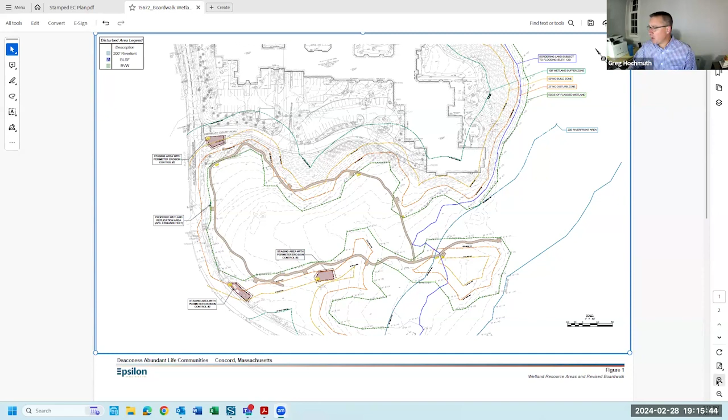Thank you, better? Greg, can you make it a little larger by any chance? I know it's still on the screen now, but I can't quite read it. Yeah, I'm gonna zoom in and maybe we can just kind of go through it. That's great. Wanna start here, Dave? Yeah, that's fine. I'm not seeing the color coding for the different resource areas on this one, like we showed this morning. We can talk through it anyway. It's not a big deal, let's do this one here. Oh, there you go, perfect.

That's the one, okay. So this would be the western portion of the proposed boardwalk loop. The areas shaded in green are areas that are in bordering vegetated wetlands. And Greg, if you want to scroll to the east a little bit. So this is heading towards the Sudbury River. And that solid blue line at the 120-foot contour elevation is the extent of bordering land subject to flooding. So that last section of the proposed boardwalk, which is colored grayish blue, is in riverfront area and bordering land subject to flooding. The hatched portion of that blue is BLSF, and there's a little sliver of riverfront area that extends to the west of that.

The boardwalk was - Greg and Bill spent significant time out at the site trying to realign this thing and pull it out of the bordering vegetated wetland (BVW) to the most practical extent, consistent with the goals of the project. We've reduced it by, I think, at least 50% in BVW.

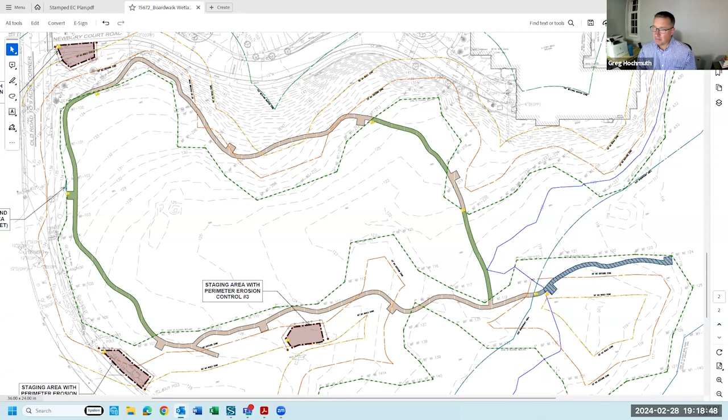The other areas where it's showing in BVW are just two crossings in order to complete the loop. We tried to pick spots that were void of vegetation to minimize any impact to shrubs. No trees are proposed to be removed at all as a result of this new layout. We did have to cross the wetlands, so crossing at the narrowest points seemed to make the most sense, so we could show the commission we've done our best to minimize impact to resource areas.

Delia, was Bert out there visiting the site? Do you feel pretty good about minimizing the boardwalk in the BVW? Yeah, obviously there's topography and other considerations out there.

As Greg said, we're avoiding trees. We're not avoiding trees just in the BVW - we're actually avoiding cutting trees down for the entire boardwalk, including in uplands. So you're right, topography is definitely a factor.

Sorry, if you don't mind, I'm just going to move this. Okay, sorry, go ahead.

Sorry about this - since this is intended to be an ADA compliant boardwalk, we have to be mindful of topography and grades. We can't have people in wheelchairs trying to climb and go down things like this, so those were factors in this new alignment as well.

As far as the narrative, we did expand it. Bill provided a bunch of construction information as well as photographs of similar projects he's done in towns in Massachusetts, and that was part of the package we provided. It went into quite a bit of detail in terms of the phasing of construction and all the individual steps required from beginning to end to construct one of these things.

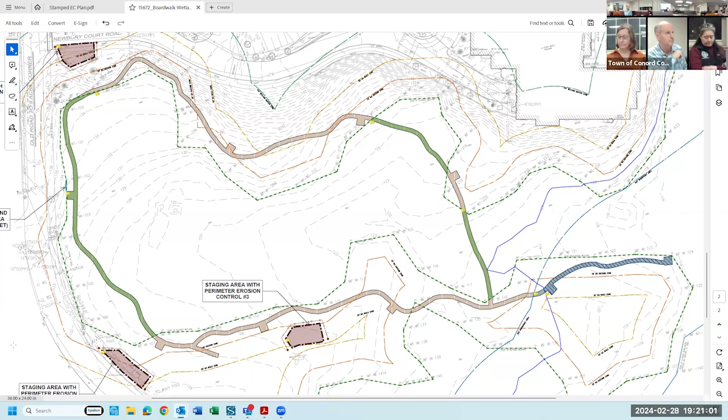The site plans, as Greg mentioned, were prepared by Nitsch Engineering, and they signed and stamped these plans. They are a professional land surveyor, so we've got much more detail than what was originally proposed on those GIS-based figures.

There are three polygons that are kind of almost flesh colored that are intended to be the staging areas, and those are all in uplands. Those are surrounded by sedimentation and erosion controls, which we discussed at the last meeting - the commission wanted to see those.

We are showing a proposed replication area on the western side of the project of 6 square feet. That is intended to offset the collective footprint of the posts that are going to be in bordering vegetated wetland. If you add all those posts up in BVW, it's about 2.9 square feet, just under 3 square feet. We're prepared to put a replication area in to offset that at at least a 2-to-1 ratio.

But we're also removing the bog bridges that are in the BVW, and those total about 150 square feet. So if the commission is willing to accept the removal of the bog bridges in lieu of us going out there with shovels and digging a 6 square foot hole, we'd be happy with that. I think we can figure that out.

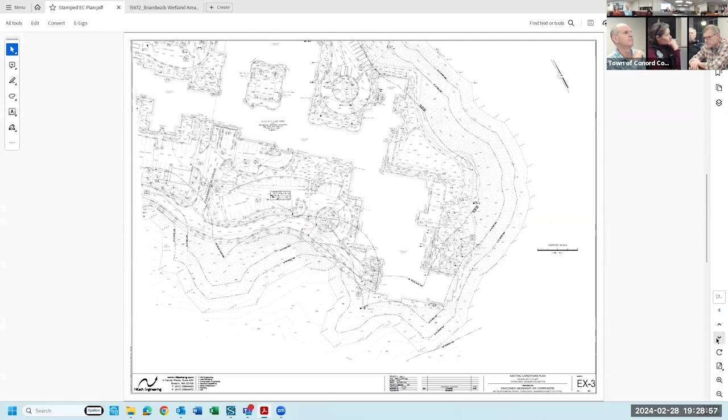It doesn't look like it's on here, but we can get that on there. Good, okay, thank you.

And then I think one of the notes we're looking at is really a question regarding width of the boardwalk. As you're prescribing it, I think it's 4 feet now, if that's correct, in the BVW. And then there's the question about how high that boardwalk is, by way of looking for basically 1 foot of height for every 1 foot of width. I'm not sure exactly what your heights are in the boardwalk, if you will. So that's a good question.

In fact, we had a conference call via Zoom this morning with Delia and Bert and the Wetlands Program Circuit Rider for the Northeast Regional Office, Alicia Galen, to try to get some idea of what DEP's guidance or expectations are with respect to that.

They don't have a formal policy. I think in the past they have ideally said that you would try to match the height above the ground of the boardwalk with the width of the boardwalk, but it's not a hard and fast rule. What they really want is to just ensure that the function of the wetland is still being provided based on the final configuration of the boardwalk.

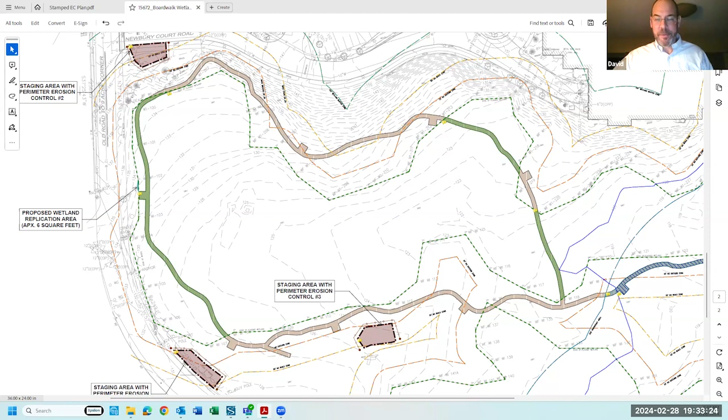I think the concern, David, is that we're really focusing on the potential impact from shading. We're hoping you can provide some comfort that if the boardwalk is raised 2 to 3 feet, there will be some... I understand you can't say what the plant community is going to be, but I think the commission is looking for confirmation or some level of comfort that you're not going to have a bare soil condition, since that would then be an impact that you should be mitigating for.

Also, yeah, I agree with you. And I'm wondering, Bill, you're working with Mass Audubon - I think they ought to have guidelines about that. They have boardwalks, for example, down in Broadmoor in South Natick. They're fairly high, though it's been a long time since I've been there. But I would think they'd have guidelines to help us figure this out. And if DEP doesn't, what about the boardwalk in Carlisle?

It is raised, and there is vegetation growing underneath it. Yeah, you're right. Is it the cranberry bog area? I don't think it's the cranberry bog. There's an overlook. It's not Foss Farm. I can't think of it.

Well, what about Minuteman? How about on Great Meadows, right down on the Dyke Trail? There's a boardwalk that goes out - I was out there for observation today. Oh yeah, good, yeah. And that's pretty high, nice.

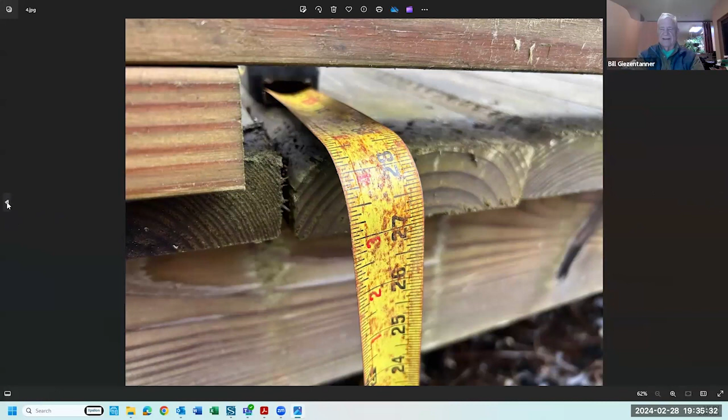I'm going to pull up some photos. Let me see if I can pull these up. Well, while Greg's doing that, let me say every boardwalk we've built has been kind of an experiment. For the most part, we have vegetation under even boardwalks that are 6 inches above. This is a terrible season to be out there trying to show that, because almost everything is dormant. But if you've been to Mass Audubon sanctuaries and looked under boardwalks, you will see vegetation. It's not the same vegetation that's getting full sun, but there is vegetation underneath.

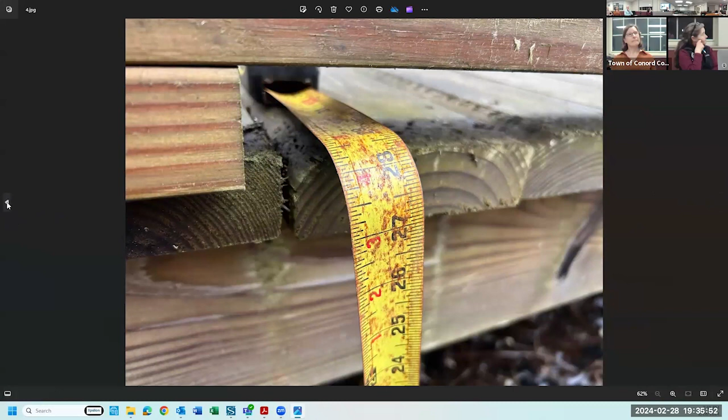And Delia, you do note, at least in our notes, the issue in Lincoln, for example. Isn't that DEP telling Lincoln they should raise their boardwalk? So they said they should provide replication, and then DEP very recently withdrew that appeal. Okay, said we can figure it out. I see, okay. So in the call we had with DEP this morning, the guidance we understood was basically that the commission just needs to have enough information that they feel comfortable.

That the impact from shading will not occur. And so if we move forward and say the 2 to 3 feet is fine - just out of curiosity, what happens in 5 years if there is a significant impact? I mean, it's all dirt underneath and there's vegetation on either side. Is it just what it is at that point? I think that's correct. At that point, it is what it is.

I think the commission - I think having these photographs would be helpful. Any additional information the applicant can provide, and then the commission should include a finding in the order of conditions that says, based on the information that has been provided, the commission has determined that this 2 to 3 foot height is adequate to eliminate the impact from shading.

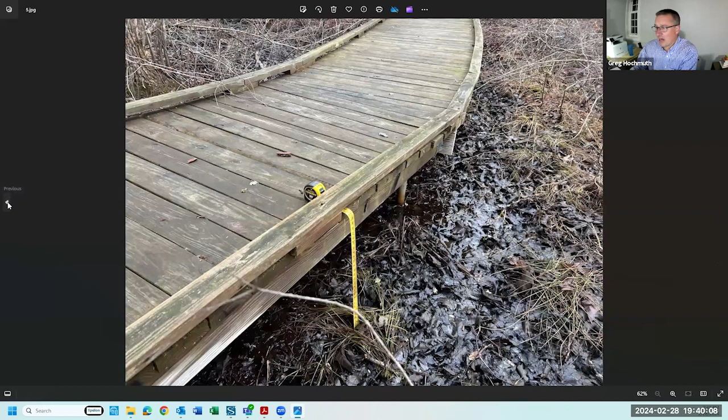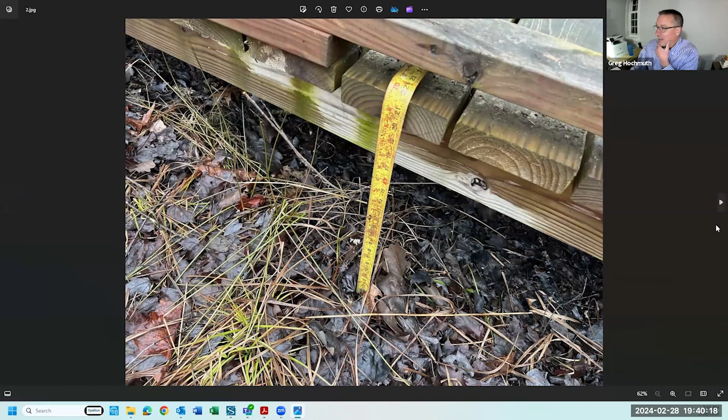I found another spot, would be helpful. This spot here was 22 inches to the top of the deck, so not quite 2 feet, a little lower. I was struggling to find vegetation anywhere, just so I could show some meaningful photos to the commission. This vegetation didn't quite extend to the middle of the 5-foot section, but it was in at least 2 feet.

I think it's not really the top of decking that matters, it's the bottom, so you're looking more at 18 inches in this photograph. So 1.5 feet is not going to be adequate. No, and we're going to be even better than that. We're going to be 2 to 3 feet.

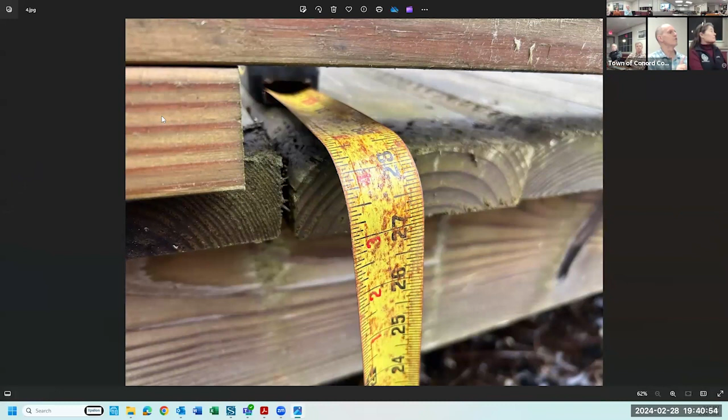So if we can provide the commission some examples, a handful of examples of where, between the bottom of the decking and the ground level, there's 2 to 3 feet where you have vegetation. I understand it's a difficult time of year, I think you're not seeing a lot of vegetation more because it's a winter condition. Maybe, Bill, maybe there are some existing photos that Mass Audubon has of Broadmoor or Minuteman.

I do think that's a great example, Minuteman. Yeah, it's worth going out to take a look at that as well. So the suggestion is that they can provide some good photo documentation with growth. With the tape measure, that's very helpful. Yeah, tape measure is great.

Are we saying that we're thinking that at a minimum, there's 2 feet of clearance from the structure? In other words, whatever the structure width is, from the bottom of the structure to grade, there's at least 2 feet.

I thought it was more, I thought it was 3. I would say it's at least 2, given what we saw in that first photograph with vegetation going into the center line with 2 feet clearance from the bottom of the structure. Yeah, it's probably even a little less, given the tape at 28 inches.

That structure is probably 6, 7, 8 inches thick, so if we can get a 2-foot minimum clear from structure and a 4-foot width, that's in the BVW. That gives you, at a 45-degree angle, 2 feet up will give you probably 2 feet of coverage on the other side, but it's mostly coming from the south, and the light.

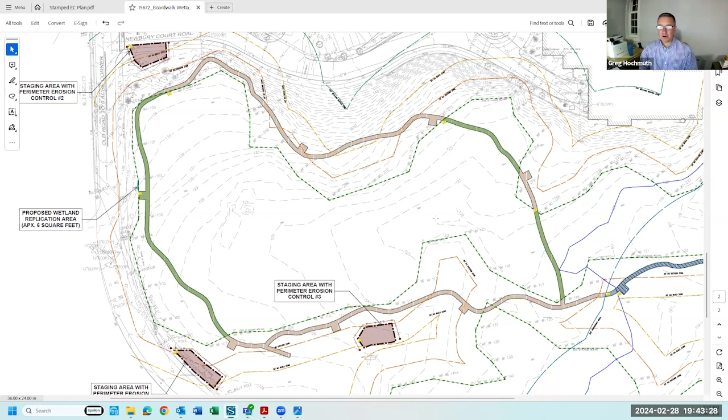And that'll be how high eventually off the... no less than 6, right, Bill? Right, we want to keep it at least 6 inches, because if you get lower than that, you're inviting rot to the wood.

Okay, gotcha, thank you for the clarification. This is silly, but why not higher? Even on the upland? Yeah, I think that's a good question, and there's no reason for it not to be higher. Thank you. I think you ought to look at that.

Good suggestion. All right. The only reservation I have is, mostly I've done boardwalks that aren't handicapped accessible, and if you're over 36 inches above the surface, then you need a handrail. Okay, these are gonna have handrails anyway, so there's no point in not being higher. Perfect, great, that's a good suggestion.

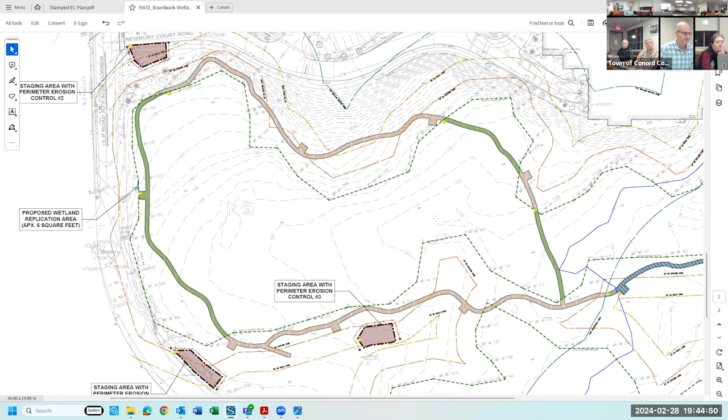Any other comments from the commission on this at the moment? No. All right, is there any public comment regarding this application? All right, seeing none, Delia? Yeah, I don't see any.

So do you think, based on... well, I guess we'll need a resubmission, right? Because we need the little ramp at the top we talked about, the location, a little bit of that stockpile, a little bit more detailing, photo documentation.

Based on the discussion this evening, would you guys be comfortable coming back for the March 20th meeting? Which means you'd have to file a week from Friday? I think that will work. Dave, Bill? I'm sorry, the submittal deadline again, would it be a week from this coming Friday? Week from this coming Friday, yes. I don't see a problem with that.

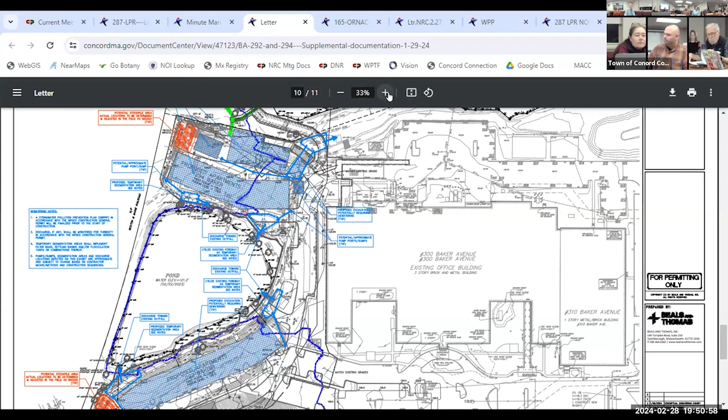Because the other part of this sketch is everything in blue - those are gonna be the areas where we're potentially gonna have to de-water. We show a few outlines where those would be sedimentation areas, either sediment basins or sediment bags, where pumping would occur. Let me just point out, so this structure, this one and this one are the ones proposed that are thought will need dewatering, right? Yes, wherever there's a relatively significant excavation, we assume.

So this light blue hatch, there's 5 areas - this one, there's one here, one second, there's 5 total, there's 3 right around the ponds. Are those the sedimentation areas, like forebays for that? Yes, that's the idea, is where the dewatering - we show a little circle where the pump location would be and the line to dictate the discharge piping, but it's all schematic at this point.

So for example, this is a sump pump here, yes, goes into this basin. So have they been sized for anything? No, not at this time. So how do you know what volume you're anticipating you're gonna need to dewater?

As part of the SWPPP, we'll have to size the sedimentation basins. But you need to do that as part of the Wetlands Protection Act regs too, right? So the construction, pollution prevention, sedimentation, erosion control plan - that's something the wetlands regs also require, right? Yes, so at this time, right now, this is all largely schematic.

It was just a matter of showing general locations of where these things would be. We haven't put any real design as far as depths, for example, but the idea was just to show logically where you could maybe grade in a basin, the flatter areas. Then I show the arrows - those would be the discharge points, really pointing those at existing outfall locations, just to try and minimize. Right, so there's an existing outfall here, there's an existing outfall here.

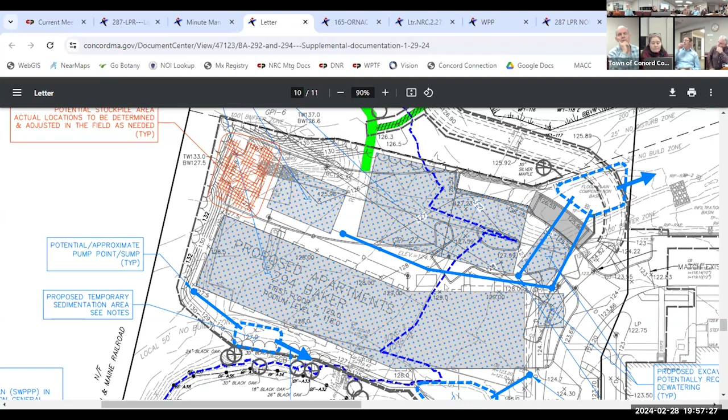So for the other building, the 292 building, there's two levels of podium parking. But I thought there was just one here too. It says first floor and podium level. Yeah, so the upper podium level is at 125, there's a speed ramp.

Basically just lower than the building on this plan, southeast, east of the building. If you can see that outline, that's a ramp that goes down to a lower level of parking within the 292 building. It's a little hard to see on this plan.

So where you see that 130.64 spot grade, right where the building bends, if you keep going to the right, that's the speed ramp. Can you see the outline there? Yeah, it goes all the way to the right. That's how you get down from 125 to 115.

Why don't you show that elevation on the drawing? The confusion is it's just showing the podium, the first podium level. Right, it doesn't show there's a level below that. We can add that, I think that would be helpful. We're trying to figure that out.

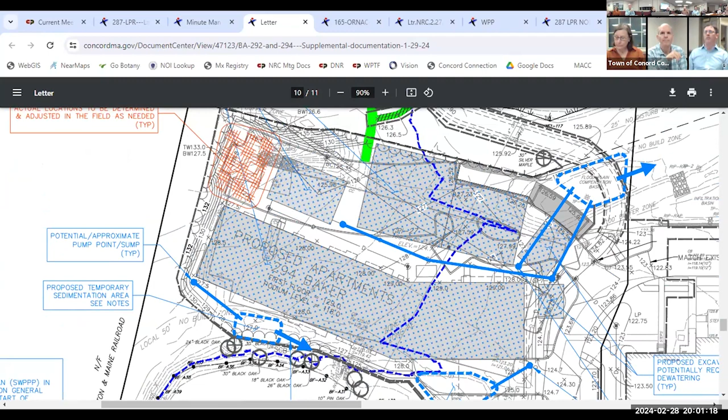I think also there needs to be some understanding of what volumes you're talking about. They'll have to calculate that anyway, right? Ultimately, right. I think what we can do is look at the permeability of this typical sandy soil, and then the area or volume that's being excavated, so we get an inflow and have to figure out how much is going to be coming out. And I think it's also helpful, for me I just roughly calculated these areas to be area-wise like 12,000 square feet between the two, and that's just a really rough approximation, not really understanding how much material is coming out.

I mean these things would have to be pretty high, and obviously close to the construction. And you're not going to ever stockpile that close to the edge of the building because you're trying to set up a foundation there while you're excavating. But the plan still is that any excess material is supposed to go offsite. These are going to be a continuous operation. It's not that they're going to excavate all of 292, store it, and then a month later haul it all offsite.

So maybe some of that methodology can go into a narrative as well, because I think that would be helpful for us to understand - whether you leave a load or take it out the next day, it's not planning to be 100 feet high. No. I'm sure you're not, but I think just having a little bit more detail would be great.

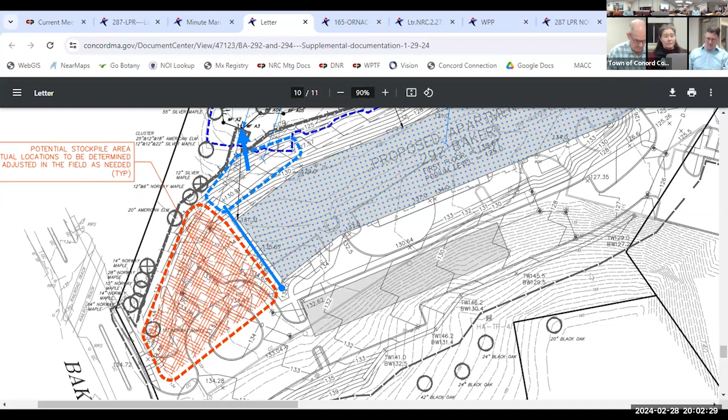And then so we had asked at the last meeting about relocating the path, and we understand that it can't come because of grading issues. We have a fairly significant grade to make up from the back of the building down to the path.

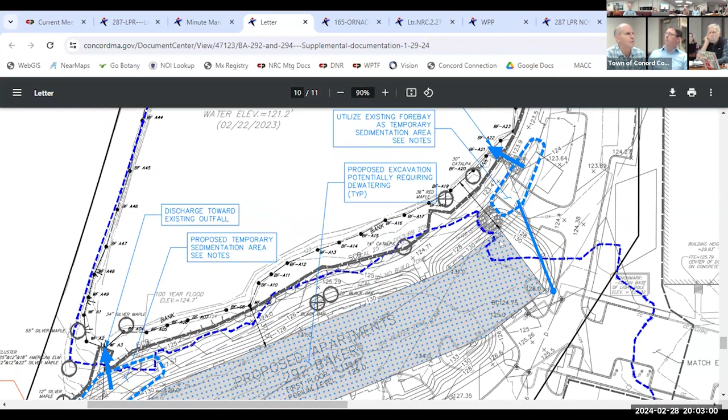The path got located where it got located, both to try to save the trees at one point, but also just due to the offset it needs from the building. I thought there were a couple little areas that last time we looked at potentially getting it out of the 25-foot setback. That's what I recollect, but there's no movement at all on that.

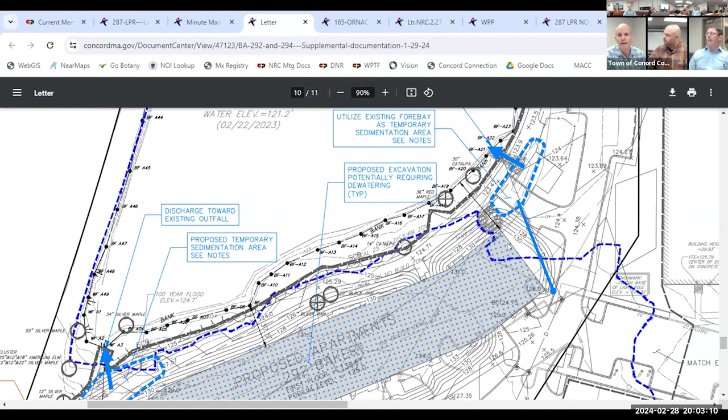It's so tight with the grading that if you can see all the grade contours as you come down from the building, down to the path.

It's 16 feet across the section. I thought it was a 10-foot wide path. It's a 10-foot wide paved path with 3-foot shoulders on each side to meet the MassDOT requirements for a multi-use trail. So the rest of the trail that the town would be doing would be 16 feet basically in width, so that's what was desired through our site. So even though it's only 10 feet wide paved, it's basically 16 feet flat.

By the way, when you say MassDOT, that's primarily to accommodate the fire apparatus, correct? Because it's also going to potentially be used for emergency vehicles - isn't that one of the primary reasons for it, fire access? Fire department's requiring it, they would like to have the access back there, whether you've got to get to the back of the property for fire or ambulance, you've got to get within 150 feet, I think.

So that's why it's reinforced on each side, but the 16-foot - originally it was always gonna be 16 feet, even if the fire department hadn't requested it, just for the MassDOT standards. It's just that 3 feet now on each side would be reinforced turf, so it's that geogrid material grass can grow up through, so you can drive vehicles on it. It has the loading capability for larger vehicles.

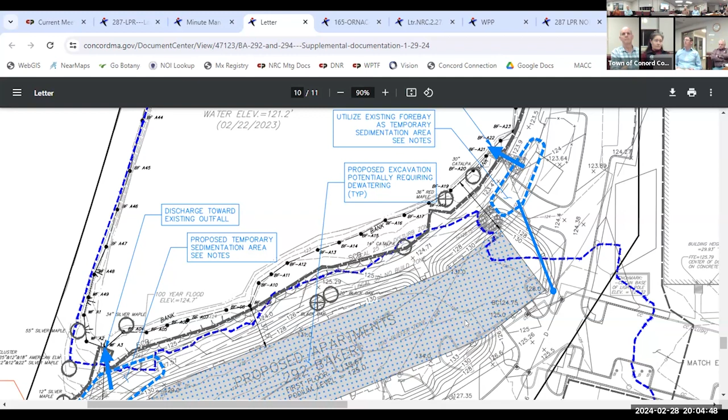But that flat section was gonna be there anyway from the start, because they like to have a shoulder so you don't have an immediate drop - you don't want to just fall off the pavement and sink a foot into the ground. If you have a walker going in one direction and a biker passing them and somebody coming the other way, the walker can get off on the shoulder, and it just provides a little bit more freedom of movement.

So did you say it was required or requested by the fire department? Required - we had a meeting with them and they noted they would like the ability to get the vehicle back there. It might not be their largest fire apparatus, but certainly an ambulance or one of the smaller fire trucks back there. Usually, given the length of the building, you've got to be within 150 feet of the corners, all around the back of the building.

Okay, well I guess, you know, mildly disappointed we couldn't at least push it out of the 25 a little bit. Show me where it is in the 25 - I couldn't quite tell, I wasn't at the last meeting. Where is it?

Yeah, that's the 50 there, so here's the 25, you see that - it's right above the thing. So it was in, if I recall - I'm not seeing the 25 on the plan. You see the word 25 right above where your cursor is, right? Okay, so there's the line that goes with it. Right, so here's the 25 - right around that back corner there, it's in the 25, and then you can see where BF6 sticks out, it's gonna be down in there as well, maybe down in that area too, so it's hard to see the line, but right down in that area.

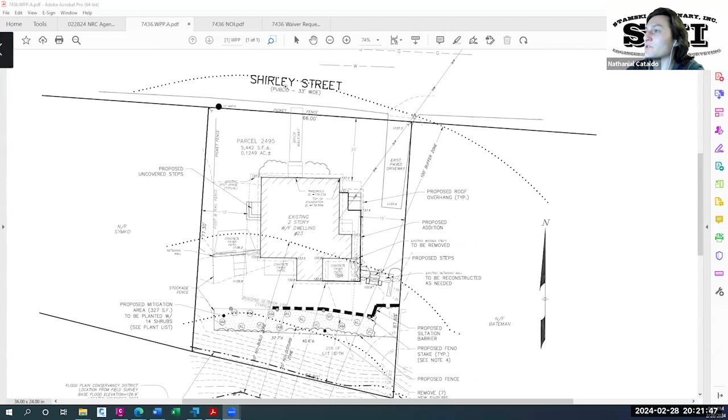All right, so this is a single family house off of Shirley Street. It's a rather small lot, less than 5,500 square feet. Shirley Street is to the north, and there's a bordering vegetated wetland to the rear of the property, off-site to the south, and it projects a 100-foot buffer zone past the front of the property. So the whole property is within the 100-foot buffer zone, and I'm hovering my cursor along the 50-foot line, and then there's also the 25. So a good portion of the house and a lot of lawn disturbed area for the backyard are within the 50, and a tiny bit within the 25.

So the purpose of this project is to construct an addition to the east side of the house, the heavy line I'm hovering my cursor on now. It's kind of a small existing house, so the purpose is to give it some extra living space - a lot of it benefits the upstairs where the bedrooms are, to make it more inhabitable. The house is more than 100 years old, so an update like this is definitely appropriate. I'll mention this is also going before the ZBA next month for the height within the side yard allowance - it's in the side yard by a couple feet, which is allowed, but it's above the height you need. Just a side note, so this is subject to ZBA approval.

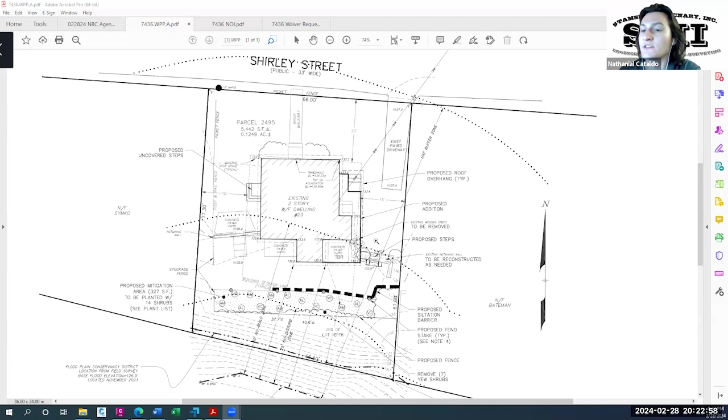In accordance with Concord's guidelines for existing structures within the no-build zone, the existing house is 37.7 feet away. The addition is holding a greater setback to the wetland at 40.6 feet away, so it's not coming any closer to the wetland.

Part of that, we have a little wall right here that we're going to either remove or do some work on in these plans. It shows us reconstructing it, but I was talking to the owner today, and they're probably going to get rid of it and regrade it. That'll be part of it, but will come in the next round of plans anyway.

I won't go through all the specific numbers, but as usual, we had a whole table going through the existing and proposed impervious surface and the mitigation requirements. We're proposing the planting area, as shown on the edge of where our tree line was surveyed, at 327 square feet planted with 14 shrubs. That's to offset the impervious area increase at the different rates required within the 50-foot buffer and outside of it. The whole table breaks it down; no need to go through every point unless you want me to.

Other than that, one thing proposed that staff commented on is a fence behind the mitigation area before the slope drops off. Carolyn could speak more about why she's doing this, but basically it drops off very steeply here and goes down toward the wetland and further to the river. So the fence is provided for safety for kids that'll be playing in the yard.

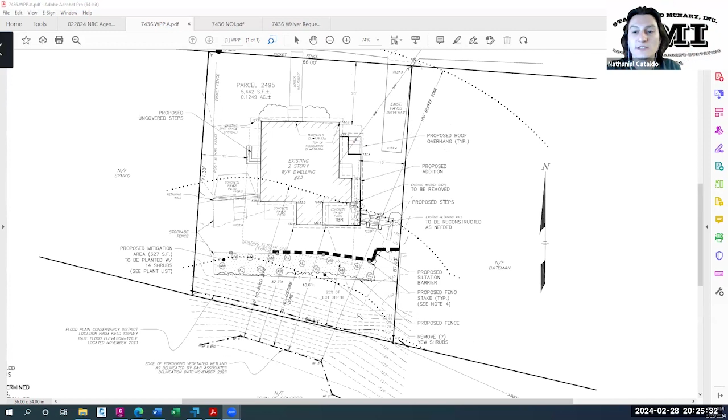Thank you for having us tonight. A couple things: first off, it's a very small house, and it's so close to the school that we decided to put the addition on, if it's all going to be approved, to make it work for a family of four. Currently there's not even a bathroom on the second floor, and that's how the whole addition process got started.

The other thing is the fence. I personally feel strongly about it because the drop-off behind the house is really steep. I have a 4-year-old grandson, and I could just imagine him going right over the side. If you think about it as a family home, because it's so close to the school, there needs to be a fence somewhere in the yard. There's not a lot of backyard, so we're hoping it's enough that two kids can play back there.

The fence is actually a safety issue. I think Bert was out there and looked at it; he really didn't want to walk down the slope because it was so steep. Right now there's some vegetation there, but that's not going to keep the kids out.

There are invasives there too. I think a fence is actually good, and it doesn't have to be a big one, maybe a 3-foot or 4-foot fence. Whether it's down the slope or up before it starts dropping off, whatever would appease everybody, I guess. I wonder about a temporary fence. That's possible under our regulations, but with my own grandkids, we put up wire fencing just to keep them from getting further, as opposed to putting up a significant fence like you're trying to put up here.

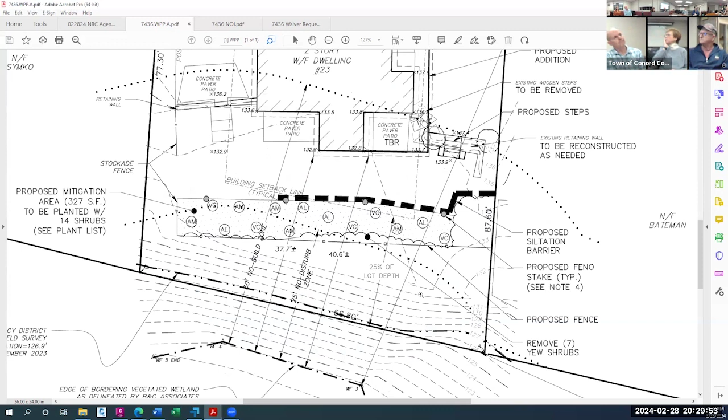Yeah, so I was just about to suggest maybe one thing the commission could consider is where I have this line that is partially the slope area and then partially the edge of what would be the planting area. That would be fully outside of the 25. Perhaps we could run a fence kind of along this line. That way it'll kind of tie into this fence, which is kind of really the non-property boundary property line fence, just because it's fully on this site, but it could tie in here and run along here. And that way it'll go lawn, fence, and then planting area, and then everything else.

So would there be any, given the size and shape of the lot, would that be something that would be approvable? Yeah, I think the commission could work with something like that. I would like to know what kind of fence it's going to be. Yeah, if it's a light duty fence, I don't think we'd want to see a lot of big posts.

I don't think you might want that either. So you do something like a split rail fence, if you can do that. Something like that, or whatever, if you guys said it should look like X, we're totally fine with that. We don't want to take a detailed look on the plan. Something that's just minimal, a fence like a lighter footprint.

If you will, light on the posts and stuff, that would be appreciated, because again, the 25 to 50, at least in our eyes, is a sensitive area, but we understand the issues you're dealing with.

Okay, all right. That detail should show that it's at least 6 inches from the ground too, allowing wildlife to scoot under. Or something like a split rail fence I described, something along those lines.

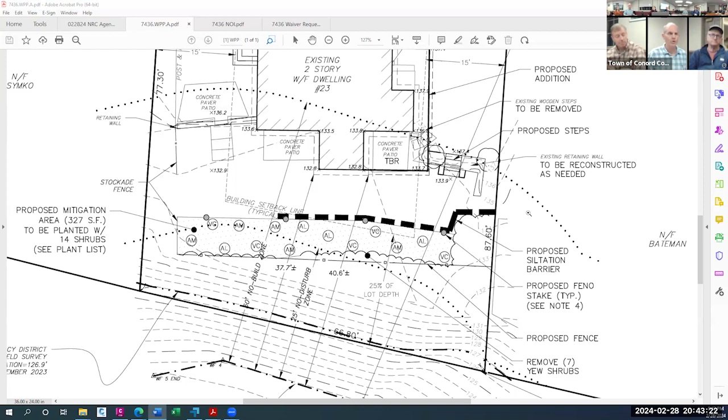So I think we're good. Would you like to continue to the next meeting with plan revisions? If so, those plans would have to be in by a week from Friday. Nathaniel sounds like he's good to go there. Look forward to seeing you back on the 20th - March 20th.

Thanks so much. Have a nice evening. Thanks, thank you Nathaniel. Nice to meet everyone. Thanks. Likewise. All right, let's see.

Next up is the notice of intent, Minuteman National Historical Park, for multiple parcels.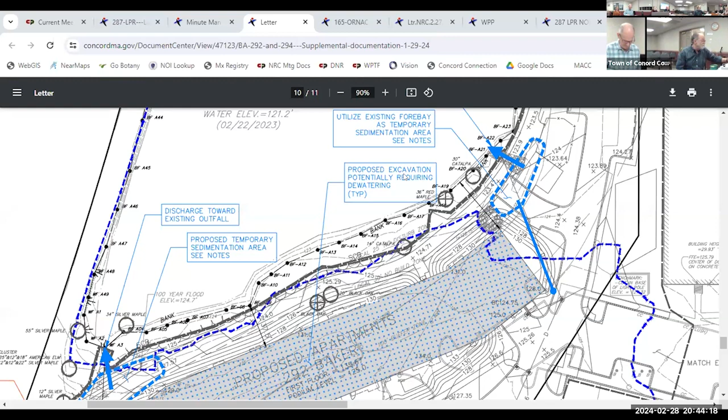Good evening, Bruce Ringwald from Goldsmith Prest Ringwald. I believe in the virtual world there are several folks out there - Margie Brown from NPS, Rob Schulster from Edward Page and Company, the contractor, and maybe a few others lingering around, just to make sure I do my job appropriately this evening. So let me ask, I can pull these plans up, but is there someone on the Minuteman project team that would prefer to share plans? No, I don't think so.

And you have the colored ones that I sent off to you? Good, good. So,

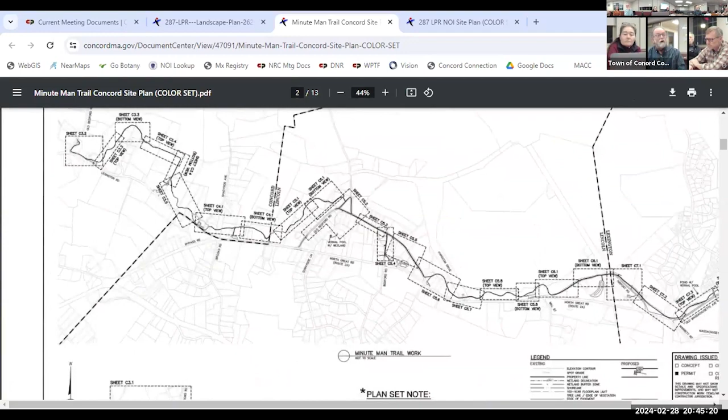As part of this project, this is a design-build project that Edward Page and Corporation and GPR are the design-build contingency for. Edward Page is also doing the construction of the boardwalks, or has done the construction of the boardwalks that you folks dealt with a year or so ago. Okay, hopefully in good ways. Yeah, it came out really nicely from what I've seen.

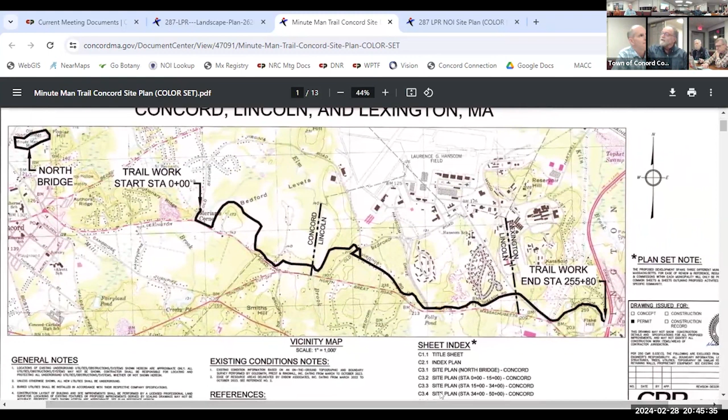So this is the whole package of the trail, and in the corner is the Old North Bridge section. I have a colleague in Lincoln this evening - Monday night we were in Lexington. Lexington has approved their order of conditions at that hearing, and is in the process of getting together, and probably will be reaching out like you guys did before for a collective order. So hopefully they'll go from there.

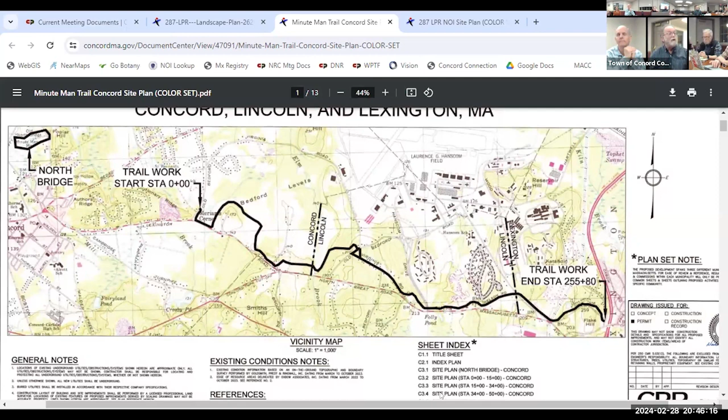In a nutshell, before we start looking at the plans, there has been a lot of wear and tear since the last time the bulk of this trail has had any maintenance to speak of. The last real maintenance was in '97, when they actually strung the whole trail together and made all the pieces we had previously into a connection.

During that course of time, the vegetation on the sides has built up more and more of a sod mat, so the sod is now higher than the walkway. This has held water in the trail and prevented it from escaping out the sides, creating long discharges. Our watersheds that used to go to the edges of the trail are now much bigger because they're collecting through the trail, and the trail has foot-deep erosion, a couple feet wide in places.

So our proposal is to come in and fix the base in many of those areas, and then fix the wearing course as well in those same general areas. With that fix, we'll have our trail base above the shoulder, and we'll be cross-pitching it as it goes down slope, so we have water going across the trail at an angle versus going down the trail forever till it hits a low spot, ponds up, and goes over - which is what's been happening.

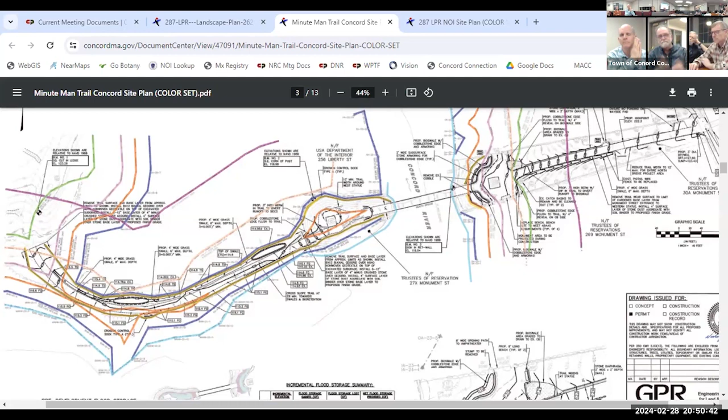Now, once we cross over the bridge and start down this next section, this is where probably the most work is going to occur. If you've walked that section that goes underwater, was underwater a good part of the winter, it may still be now, I don't know, I haven't been out there in about a month. That section, we're gonna be pulling out the base and putting in a whole new base, and then the whole new wearing course on top, because it's problematic right now. It's very, very spongy, and it's a problem.

That section is entirely within floodplain. The colored pieces you see in the corner on the plan are the pre and post, and in the center is an incremental flood storage summary. With the work we're doing, we will actually have more flood storage. Not that it's really that much, but we're not going the other way, which is the important thing. We're not taking any flood storage away. We're actually creating a little bit more.

For when there's not flood waters, we've got a depressed area along the side to allow for the water to settle and recharge into the ground and not just be an overland flow to the edge of the wetlands. That particular area, the wetlands are right up to the edge of the trail, no ifs, ands, or buts about it. There are a number of sections like that, and we didn't have wetland protection in 1775, and they marched through where they needed to march through. So we're dealing with what we have, and we're trying to make it a much better situation.

If you don't mind, if we can go through the sections and then come back with any questions.

Well, a quick question. You mentioned something about impermeable surface on the stretch between Monument Street and the bridge. Did you say impermeable? I hope not, that's what I heard. No, that's all gravel. All right, okay, good, well, gravel base and then a wearing course, and yes, crushed stone.

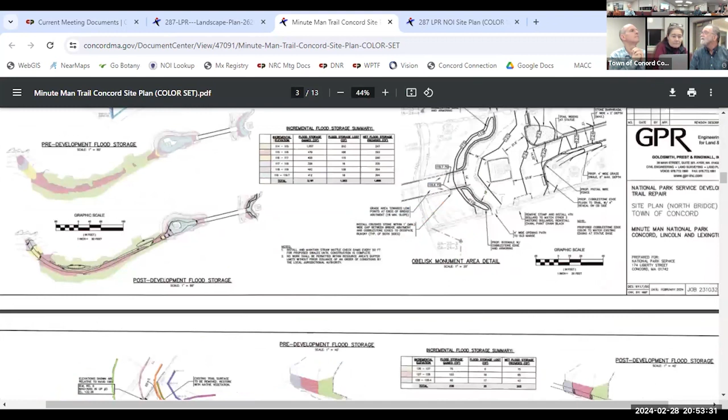Yeah, makes sense. So, let me see, where have we moved to? I'm lost on this screen, I can't tell where I'm at. Should be at Meriam's Corner, am I? I think I might have skipped ahead a little bit. No, that's the bridge, yeah, it's the bridge, so let's go up to the next page.

Yes, here we go. Oh, there's Meriam's parking area, the parking area for Meriam's Corner. You can pull that down just a whisker. There you go, it's close.

So what you don't see in the corner is the rest station and the information station right around the corner on Merriam Street. And this section right through here moves very slowly. That's all right, it's a big plan set, and you only got a third of it.

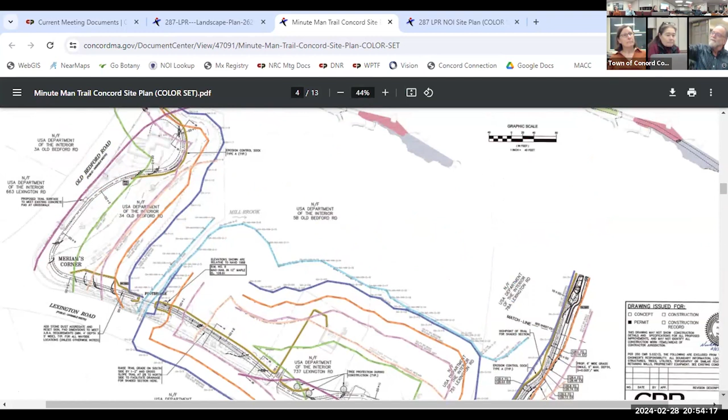So this section of the trail comes through here, it starts in the buffer zone, comes out of the buffer zone, comes back in, and then along the side of Lexington Road, around the back of the parking lot, and then we head into the field.

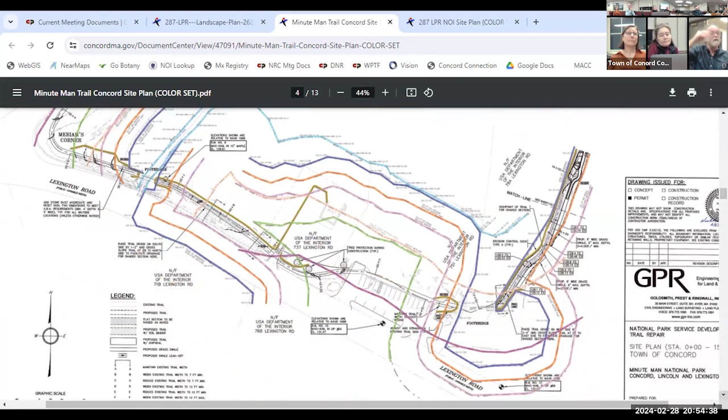There is a little piece of this that is in the flood boundary as well, and there's a flood calculation on that also. Same as the other site, we're going to create just a little bit more flood storage, not a lot, but we're not going the wrong direction. We're doing it in the appropriate manner.

So from here we cross over and we're into the field, and we're around the back of the field. Just come over the bridge here. Yeah, right there. So we go over the bridge and then we're coming down around the back of the field.

So that whole side is literally right up against the edge of the wetlands. The wetland flags were hanging. Brian was in here before. Oxbow's office did all our delineation on here. And then, you know, so we're right against the edge there.

We have erosion control proposed against the edge, using wattles staked in a manner. And then it comes out of there, and you can see that we've got a little bit of grading that happens right in the center.

This section, some of the trail, the organics have closed in on the trail, so instead of the trail being 7 feet wide, it's about 4 feet wide. So we're going to be pushing it back out to its original width, and grading it so that it has that nice little cross pitch to go across through there. I think in that location there is an existing culvert that we're going to clean up and replace.

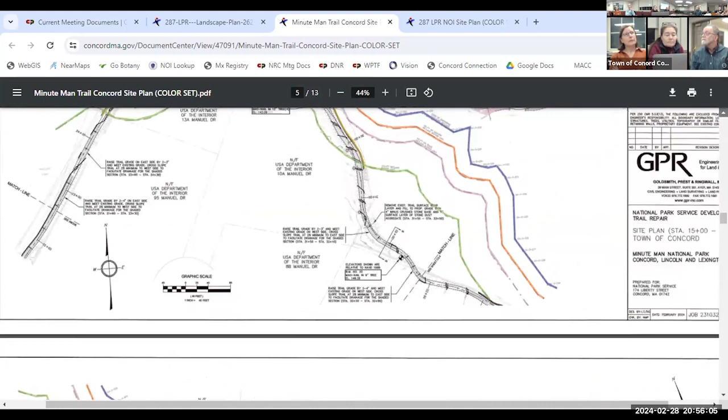If you want to move on down to the next section, we're going to kind of go along the edge of the field, and then we head into the woods. And there's another farm field on the back. We're right up against the edge of that as we come along through there.

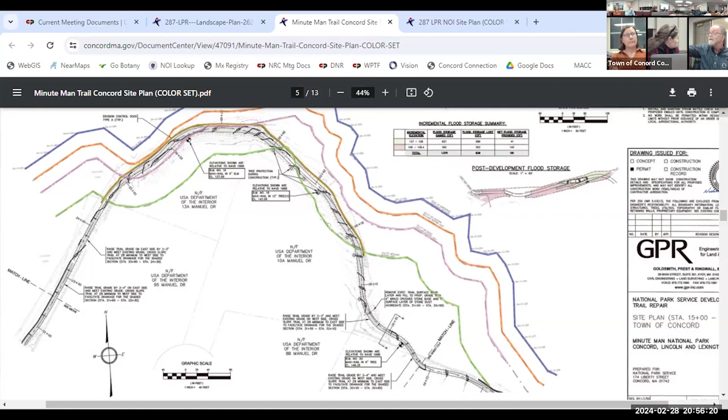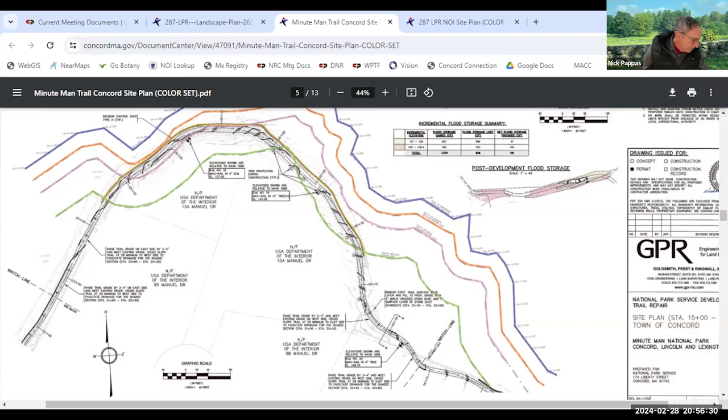And then we come up around and come out of the buffer and back into the buffer again, where we get next to, we're approaching the fields. Go to the next sheet. We're approaching the fields in the back of, I think it's the Scott House.

And you go down to where the pigs were. So this is up one of my walks. I live very near here, so I was just saying, you were coming down to the pigs next. Yeah, where the pigs used to be. I miss the pigs. They're just off to the right of that last L that you see there, coming down, that's where they were at.

So in through here, there's a couple existing culverts that cross. We're going to be checking them and making sure that they're clear and clean. And they're outside the buffer. They're basically taking the drainage from the farm field and discharging it to the downside.

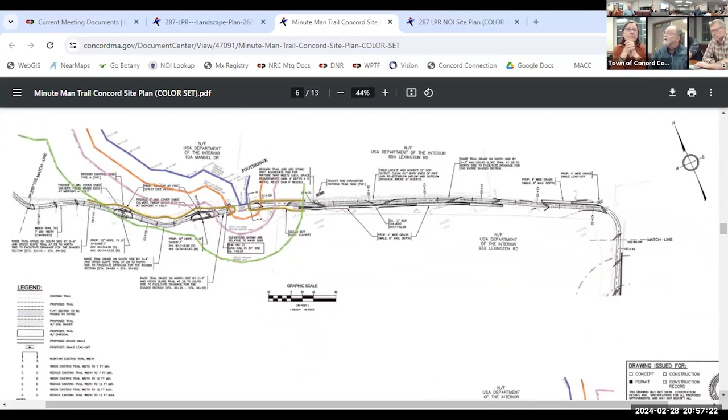If you walk it all the time, you know there's quite a slope down to the next field below there. Yeah, so as we come to the next section. Glad you're doing this. I'm sorry, Julie, I owe you on that one.

You got the boardwalk. All right, so that's good, because that brings us around. So now this is where the pigs used to be, in the wetlands there. They were in the wetlands before. And in this section here, there's a couple trees that exist along the edge. We'll have tree protection around those. And then we come on up along.

This is where they were doing the staging for the second boardwalk, the first one we just went by.

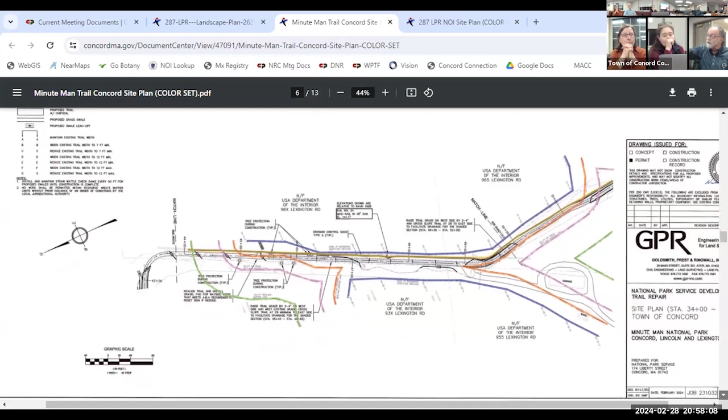Second major boardwalk revisions are just around the corner, so they'll be doing some staging out in that same area again for this work. This is where they come in, and we'll get to that page later on, but that's going to be taking care of that area.

As you go forward, you're doing right. You're faster than me, that's good. This comes on down, and then you can see where the single line is, that's the boardwalk.

In this particular area, there is a low spot that we're addressing. There's several places where social trails have occurred. We're trying to clean those up and make it so the social trails don't go, but raise those low spots so they don't become water, which created the social trail in the first place. So that's part of what's proposed here.

Once we cross on the other side of the boardwalk, there is a lot of gradient that comes down to this area. It's quite steep, and as it comes on down here, you can see by the contours it's steep, and also the angle of the contours, we're cross pitching it as much as we can.

To pitch it across, we have a whole series of leak-offs, a term that the National Park Service uses, but it's essentially an area where there's a break in the organics, no stone wall, or a gap in the stone wall where the water can just disappear. So rather than keeping it trapped in the trail the way it has been, there's a number of places where it's going to leak off and go off the trail and into the woods.

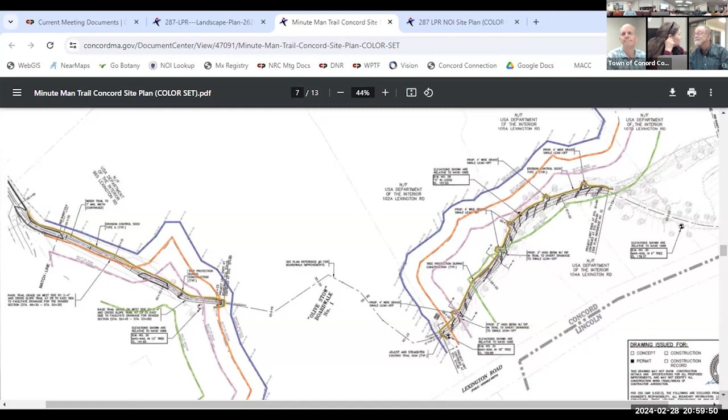I don't think it has the wearing course on it yet, but everything else is there. And then that'll be connecting on through, we'll be in the buffer, picking up right where the new trail hits the old trail.

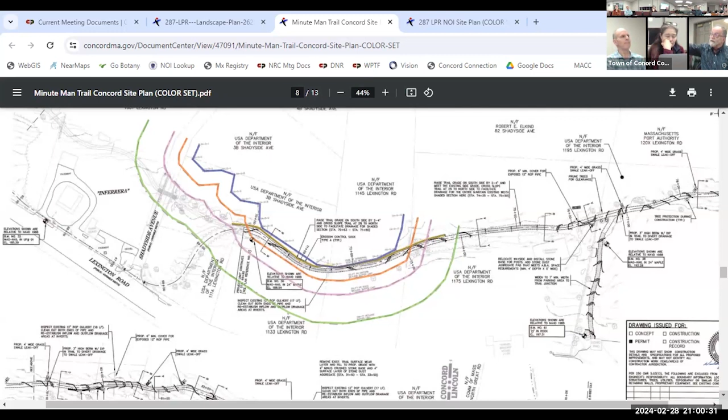And that's where we pick up here, and we'll have erosion control again along that edge of the wetland edge, along through there, again cross pitching throughout that whole area.

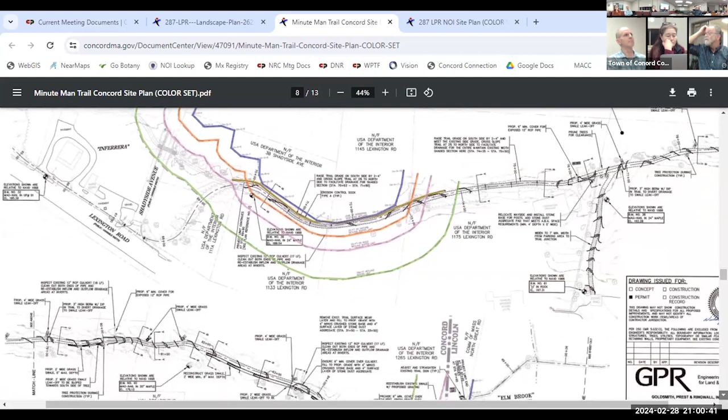And then now we're getting down to where there's another parking area and a trail coming down in on the upper part. That's all right, you rolled by it, it's outside the buffer. And then we get along to the entrance to the Elm Brook boardwalk.

That slope coming down now, as you go around the existing building and that corner leading down to there, it's probably 25, 30 feet wide right now. There was a tree that fell over that's since been removed and stumped out. The social trail over the years has cut the corner.

We're going to be reestablishing the trail back the way it should be, because if you came around the corner where everybody walks right now, the wayside sign's about 30 feet to your right. The trail's supposed to be right over there by the wayside sign, so we're going to be bringing the trail back over there, which will lessen the gradient, because it's the longer distance versus the hypotenuse. And it will help with the grade coming through there.

We'll be pitching the water from one side to one portion and the other as it goes through, to get rid of the water in the various areas so that it's not all running down. And this is where the most sediment had collected on the boardwalk. I think they had to brush off probably about the first 30 feet of the boardwalk when they were in there removing the sediment to take the old one out. So those are the areas.

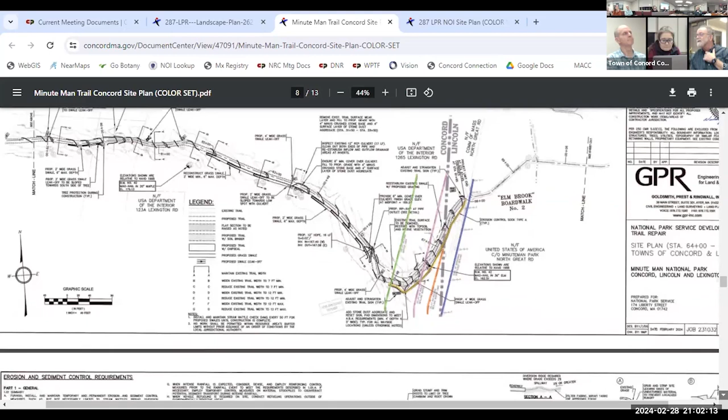And if you go a couple more sheets, Delia, let's kind of go over the details real quickly, if you don't mind. Would you have to close everything down while you're doing it?

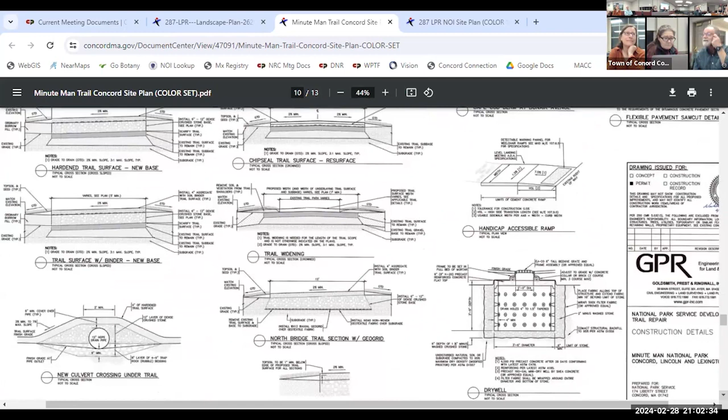Yeah, we had sections closed for the boardwalk, and we'll be doing that again. The signs will be there, and it's going to change your walk and a lot of people's walks from time to time. But so we gotta go, I'm basically taking you to the last sheet if you could.

Yeah, right there, perfect. So these are the staging areas. The first staging area is at Merriam Corner.

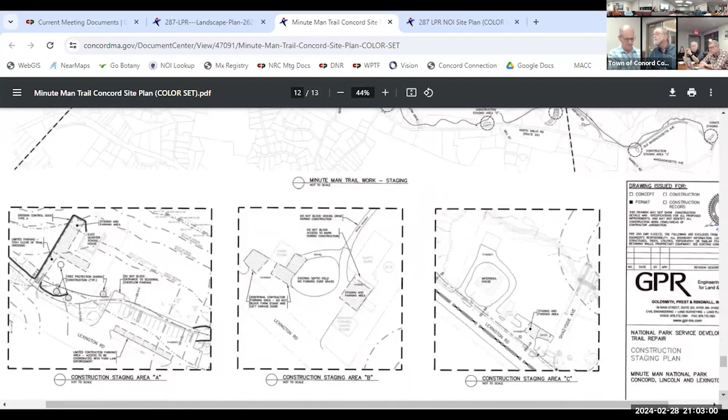If you go down to the bubbles, they work better. So the first staging area is Merriam's Corner. We'll have erosion control around it, obviously. It will be some storage of equipment and the workers' vehicles. Most of the material will be loaded and hauled right out, or unloaded and put into place as we're going through. There won't really be stockpiles of material, because we hope to be putting it right into place. Staging area B is at the Scott House, and staging area C is Shady Side.

The first one on the next page, I can't read it from here, but I believe that's where we're doing some tree work. There's a house right there, right on the side of the road. It's just up from the intersection of Lexington and North Great Road, 2A. That's the first one.

The second one, E, is at Hartwell, up at Hartwell, and we'll be using that lower parking lot there. We'll be working the trail on down, but that's into Lexington, so we don't have to go that far. Hartwell's in Lexington.

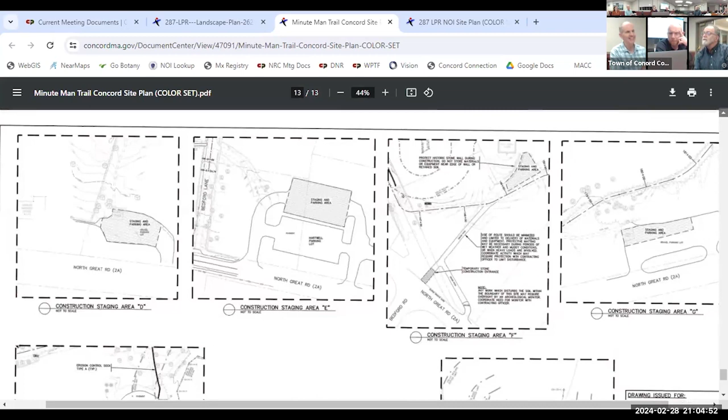So the question is, can you get that staging area out of the no-disturb zone? I think the comment was some of that staging area is behind the house, within the no-disturb zone. If you scroll down just a little, it's hidden behind there somewhere. Oh, there you go.

Thanks, Nick. So the staging area up there, does it intrude into the buffer? Oh, I see what you're looking at. Yeah, we can definitely pull that up above there. That won't be a problem. Good, I'll make note of that, definitely.

So it's fair to say, Delia, the floodplain calcs are still being looked at by CPW? Yes.

You're good with the overview? I am. Thank you for that, very helpful - got us all oriented correctly now.

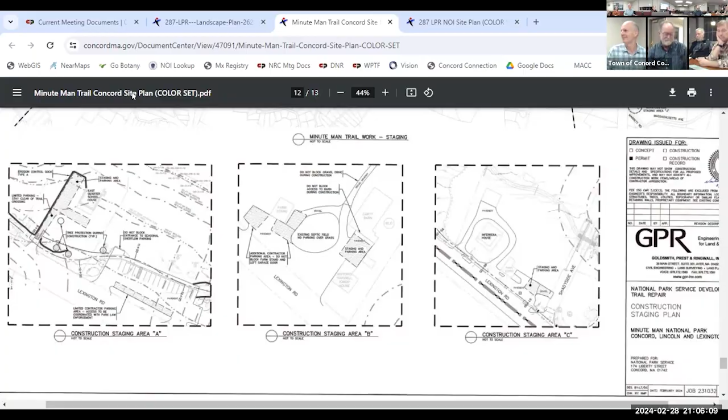Any other comments from the commission? Seems good. It seems like a great project, necessary. 27 years later, you're coming in and cleaning it all up. Well, that sounds like it's time. Just in time for the 250th, hopefully. We don't wait till the 275th or whatever for the next round. Yeah, that's right.

I do have a question though. So if you're doing it through this summer, the areas that you're going to seed at the sides - I guess you'll seed in the fall? We'll probably be seeding at a number of different times, and have straw down, because as soon as we have an area done we'll want to seed it, whether they come through and water it, or we just count on some mulch and hope for not as wet a summer as we had last summer, or not a drought like we had.

But it'll be obvious by then, won't it, where not to walk? I was just thinking about it - there's a lot of places, especially like in the Old North Bridge area, where they have the iron rods that come up with a loop and run the rope through. We're gonna be doing a bunch of that in a bunch of places, probably permanent, to try to control the spread. That's what I was thinking, okay.

I just have one question. So you said in the woodlands you're gonna use that compost mulch, but you're not planning to seed it? Yeah, there's some areas right now that have a lot of moss and just leaf litter.

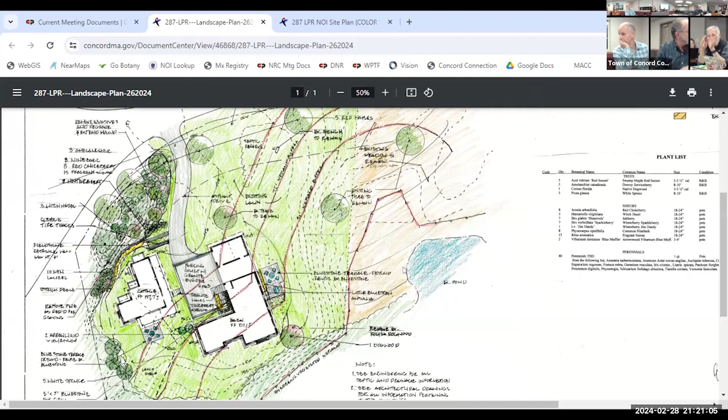So, go ahead Bill. So Bruce, the whole house is being rebuilt, right? The entire house is being rebuilt. So why not bring it back, so it's out of the 50-foot no-build zone? Wouldn't that make the most sense, just to move it?

And along that same line of thinking, Bill—yeah, I don't have the experience, but most of the projects I've ever seen are similar to the small house we saw earlier, where the house is 35 feet away and they're adding a small addition no closer. I don't have experience where the whole house has been torn down and then kind of claiming grandfathering of that location.

It seems odd to me a little bit, because there's nothing there anymore. There's a basement, but it's gonna be reconfigured—you're not gonna land on that same foundation. No, we're not gonna land on the same foundation at all, that's a new foundation.

So, understanding that it is a grandfathered condition, the way these projects have been approached in the past, if there's the ability to move it out, that would at least be considered. What if, just to maintain the views and everything else, this were pulled back so that this portion is outside? If that happens—

We get too close between that house and the ADU, because you pinch in as you pull this back—this space pinches right into nothing, there's no space there. You can't get through, this roof touches this roof type scenario. Well, it's an L shape, you could actually just pull that one portion back, not the whole house, right?

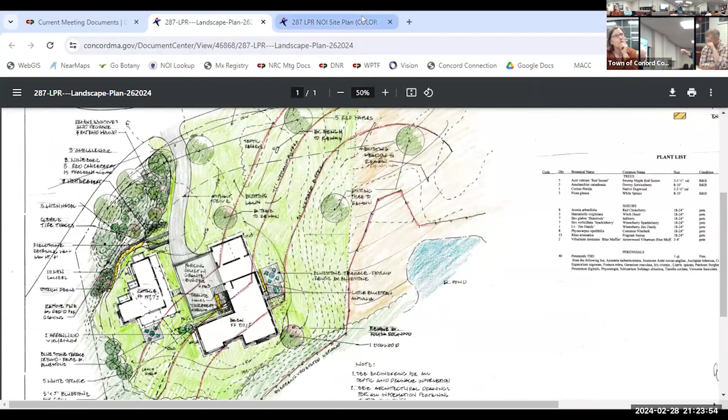Which plan are you asking to look at? No, the landscape planting plan? No, landscape - the one that I brought in, I brought in an additional sheet a week and a half ago. I just have your colored plans that you sent for presentation.

So there's another sheet that I submitted, and this reserve septic system that we have to do because it's new construction is here. And then there's the drainage, there's an offset to the drainage. This drainage is pulled right to here now because it had to meet that offset, and that's on that other plan.

And just to submit those so that the board can see what those look like. Hopefully some of those iterations are considering moving that out of the 50, or if there's things that are precluding that ability to do that - having a little bit more of a comfortable understanding of why that can't occur.

Okay, and so just so I'm clear, just so I learn from tonight - if you were to tear down a structure completely, that maintenance of that setback from the wetlands is still valid as a grandfathered condition? It is grandfathered. Okay, yes. Okay, I didn't know.

So the way that, you know, that closest point still is maintained - like, remember the project on Ridge Road? Ridgeway, where they did a demo and they wanted to construct closer, and the commission said that's your hard line, you can't. It was a small site, there was definitely no ability, but they were expanding the size of the house, so they had to maintain that limit of the encroachment.

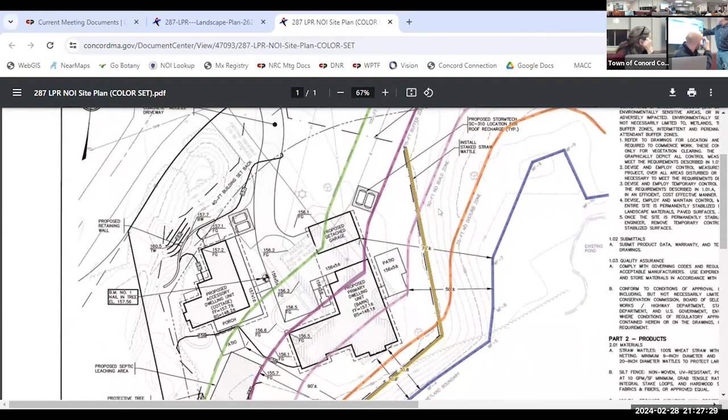In here, it doesn't get to the 25, but it goes past it. The reason is because I've got to get to daylight, and I can't even get to daylight with the one that goes past it.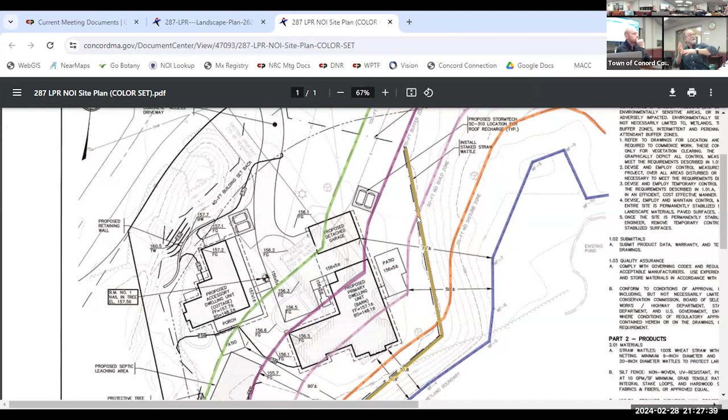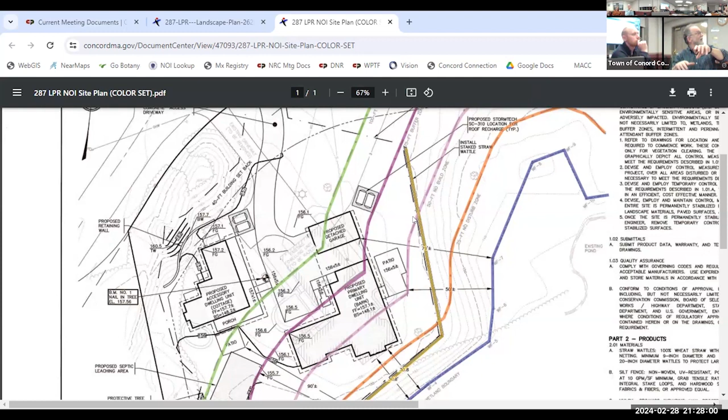So I'm going in and I put in a 2x2x2 area of crushed stone, trap rock, so that the pipe level is down here. It would fill up with water if it didn't absorb into the ground, and it's very sandy soil here, so mostly it's going to absorb into the ground. But if by chance we had crazy rains and that thing filled up, it would just have a 2 foot wide level spreader to overtop over the vegetation towards the wetlands. This is groundwater discharge and/or roof water discharge, which is clean.

You can't still pull it back out of that though? No, so the grades - I think we've pushed it as far up as we can to get it as far away as possible. Going the other way, I have the septic system in the way, but if I went that way, I'd be right next to the wetland to get to that grade.

Well, I think perhaps maybe we just see it in more detail. I will definitely have it be talking more abstractly about it, but yeah, we do have a plan, but it's not on the colored set that was provided for the presentation, but I will get it in one plan. That's fine, but it would be helpful to also have that be part of the narrative.

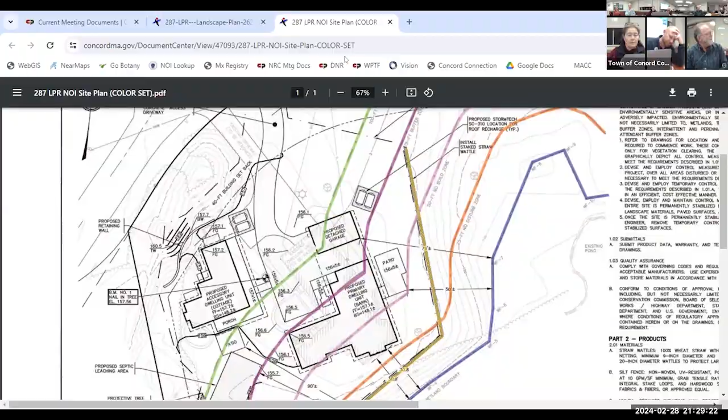It is in the 50, you're requesting a waiver for that. Yep, providing the mitigation and then alternatives, like why can't that be done - and I think that's legitimate. Completely, you know, that's where it daylights according to grade. But are there other options? You never want to rely upon a pump for your drainage. You always want a daylight, if you don't have to. A lot of older homes, we have to use pumps. But with existing, it doesn't have it - you don't want to do it if you don't have to.

Okay, and you had mentioned you're working on the table, et cetera, so. Yep, I got all those other things and I'll have a revised set of plans before next Friday. Great, we'll see you back on the 20th. Good, thank you. Thank you. Guys, have a good evening. Yep, you too. All right, I think that closes that out.